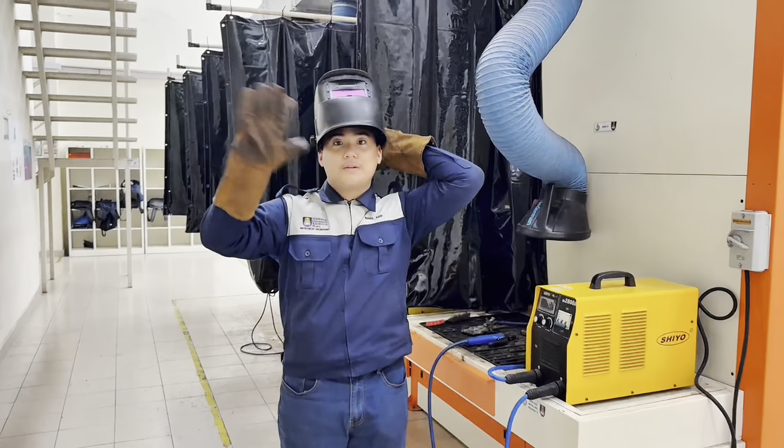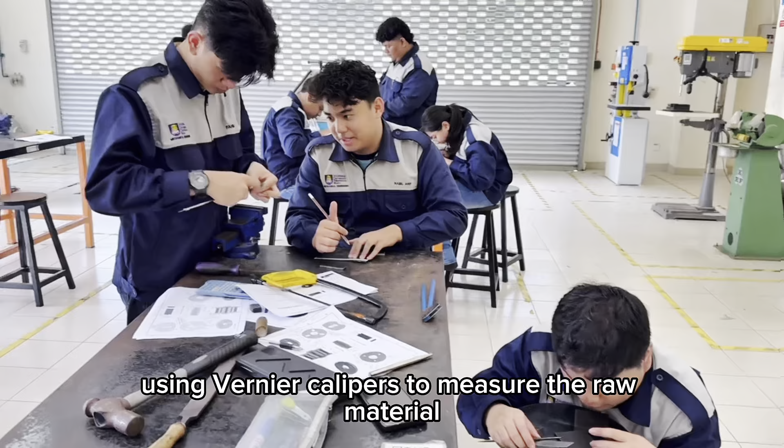I will be explaining the complete manufacturing process of our turbine blade, step by step from raw stock to the finished product. We started with measurement using vernier calipers to measure the raw material. Next, we cut the material with a bandsaw, shaping the stock closer to final size.

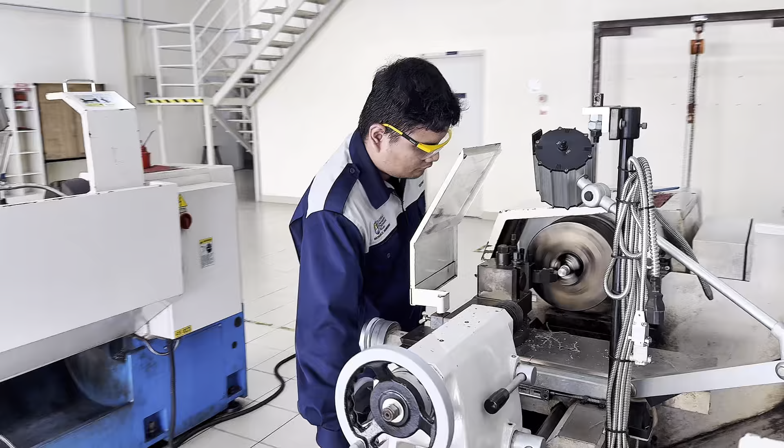After cutting, we did lathe machining. This step shapes cylindrical parts like shafts, ensuring they are perfectly round and concentric. Precise turning is especially important for parts that rotate at high speed, like turbine blades.

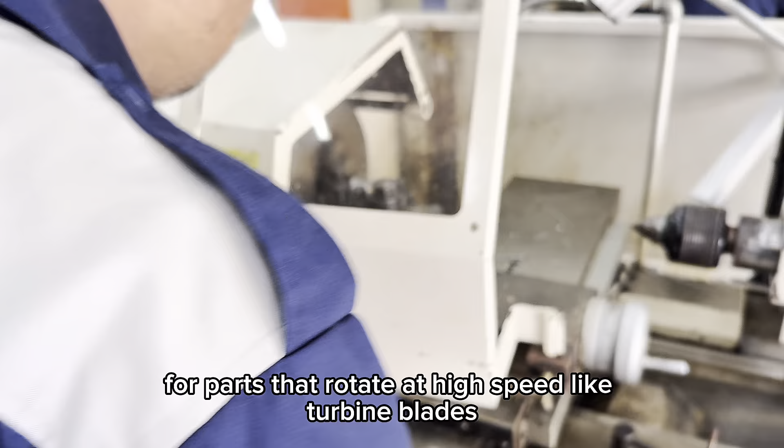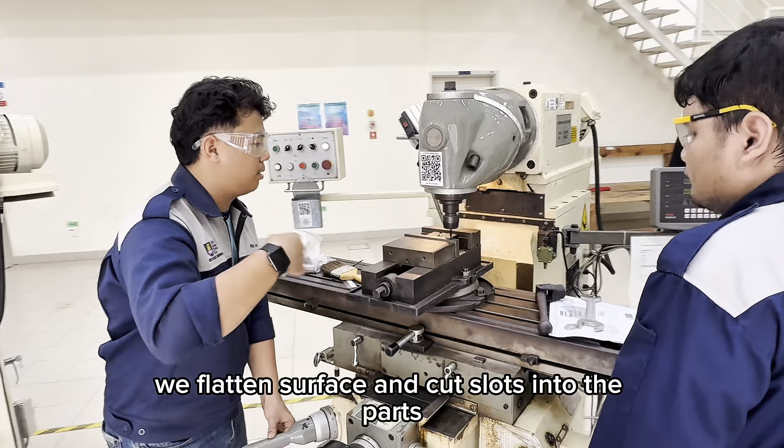Next came milling. Using an end mill tool, we flatten surface and cut slots into the parts. This ensures that every component has the exact shapes and size needed to fit together correctly when assembled.

With surface prepared, we move on to drilling. This step was done with both bench drills and vertical milling machines to create accurate holes for the screws and blades. Positioning these holes precisely is crucial for proper alignment during assembly.

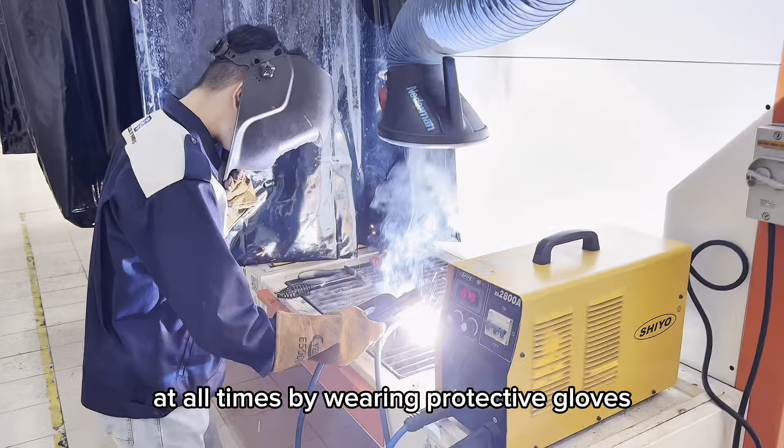Once all the parts were ready, we used welding to spot weld the blade onto the plate component. We made sure to follow strict safety measures at all times by wearing protective gloves, welding helmets, and fire-resistant jacket to keep everyone safe during the welding process.

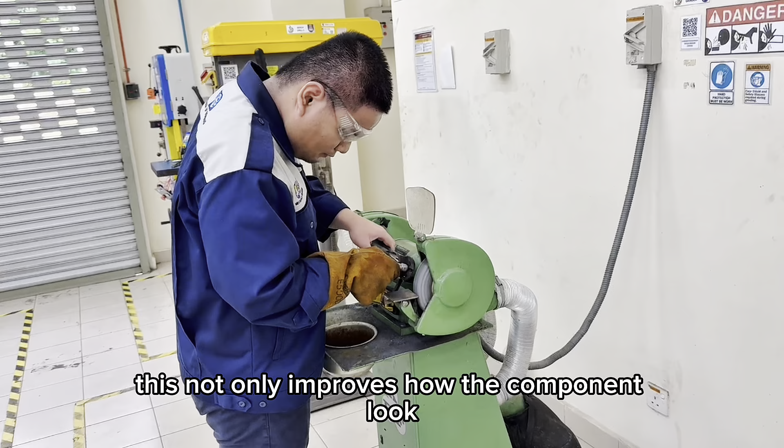Finally, we did grinding to remove weld bits and smooth out the surface. This not only improves how the component looks, but also helps align the parts properly and ensures a clean, professional finish.

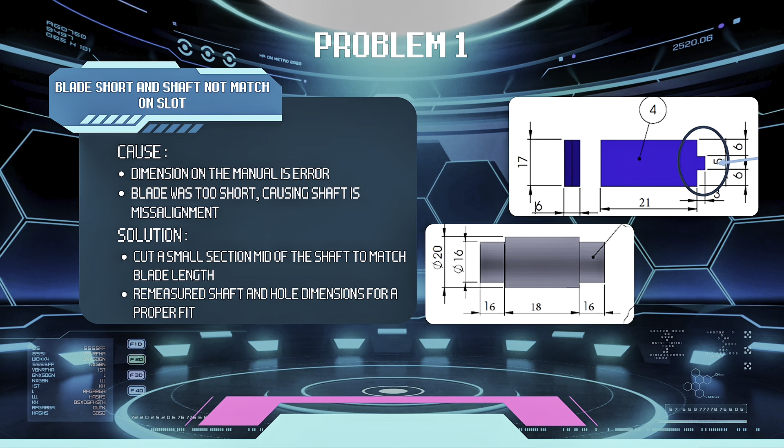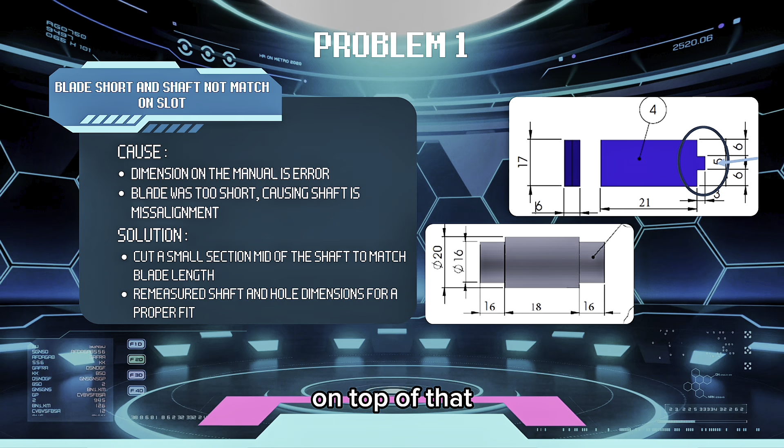Next, problems that we face and their solutions. The first problem that we face in this project is blade short and shaft does not match on slot. The issue happened because the blade was too short, which caused the shaft to misalign and not fit correctly into the slot. On top of that, there was a dimensional error in the manual, which affected the accuracy of the shaft and hole alignment.

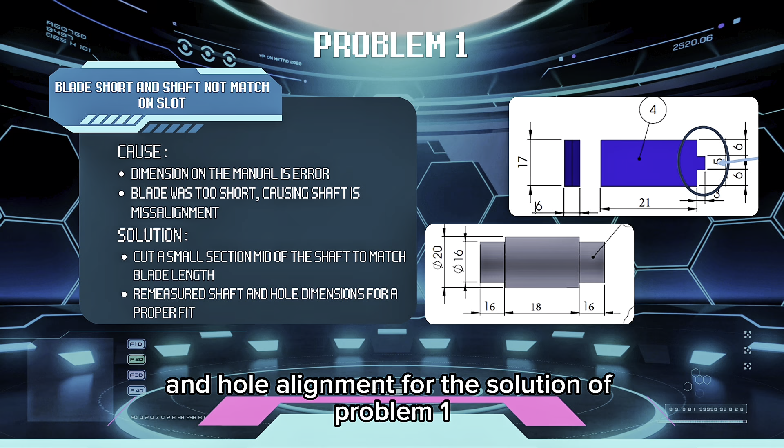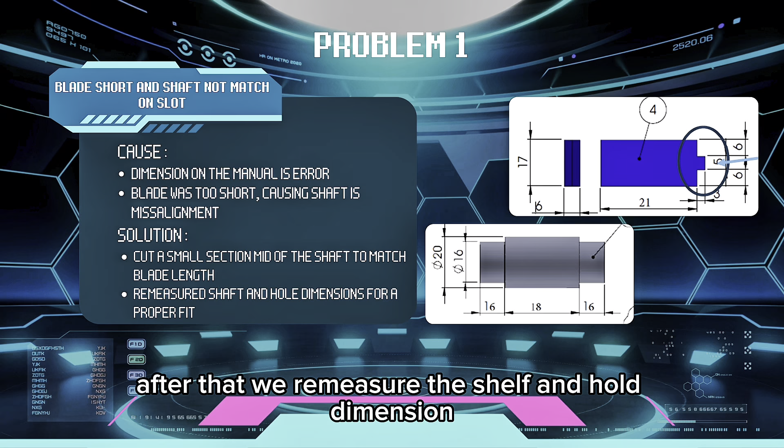For the solution of problem 1, to fix that, we cut a small section from the middle of the shaft to adjust for the short blade length. After that, we remeasure the shaft and hole dimension using precise tools to ensure a proper and smooth fit between the shaft, plates, and blade slot.

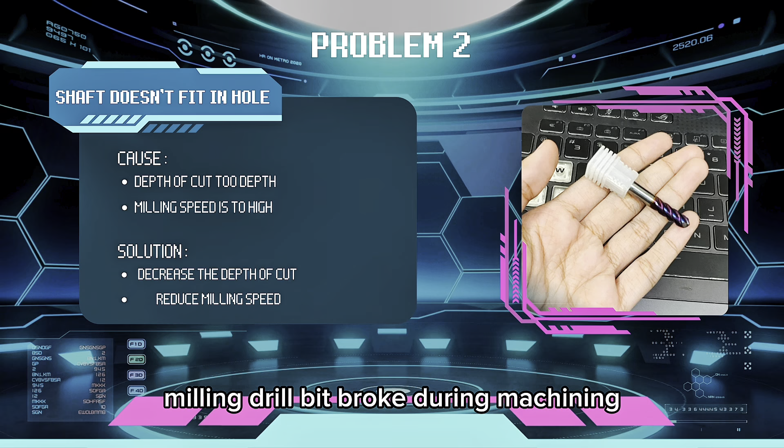The second problem is the milling drill bit broke during machining. The milling drill bit broke because the depth of cut was too deep and the milling speed was too high. This incorrect setting causes too much force on the tool, leading to breakage.

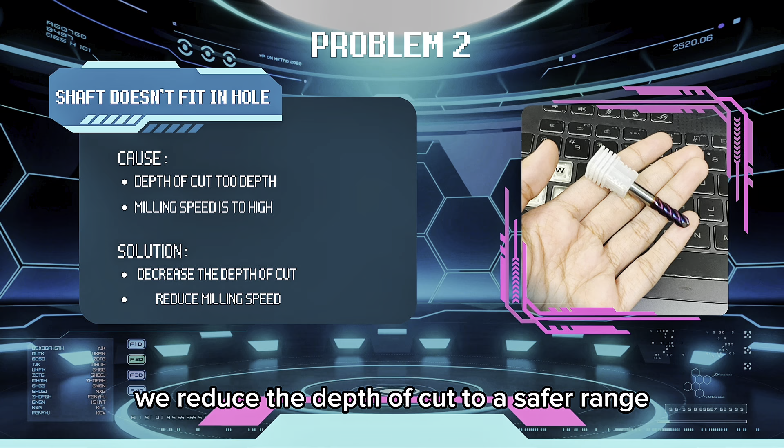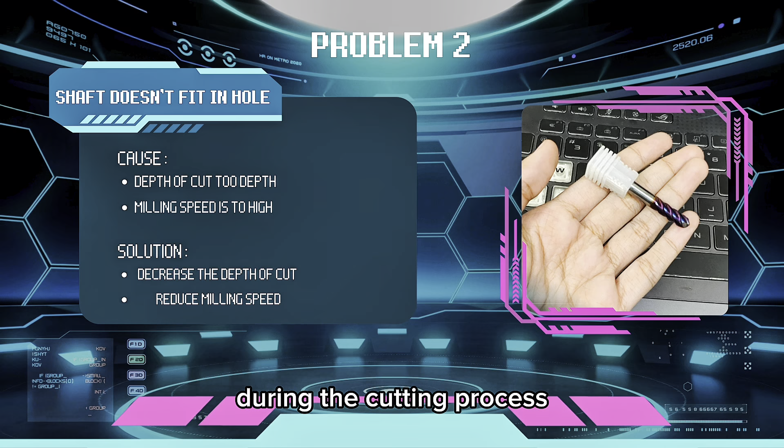The solution for problem 2: to fix that, we reduce the depth of cut to a safer range, around 0.4 mm to 0.6 mm per pass, to avoid overloading the tool. We also lowered the milling speed to reduce stress and heat during the cutting process. This helped ensure smoother machining and prevented further damage to the tool.

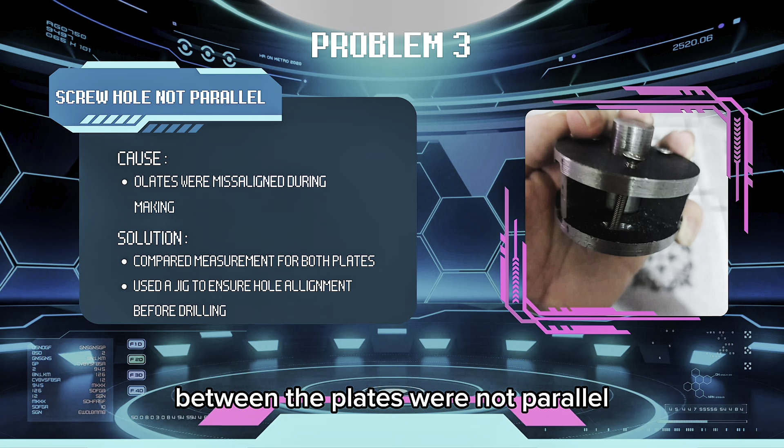Another issue was that the screw holes between the plates were not parallel. The plates were slightly misaligned during making. Our solution was to compare measurement for both plates and use a jig to ensure hole alignment before drilling.

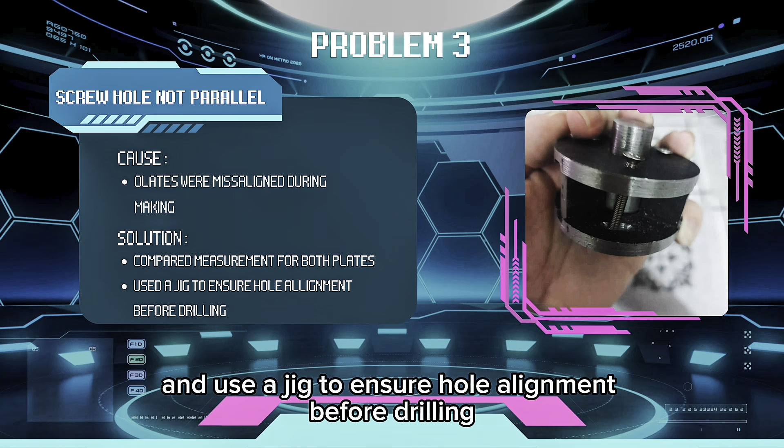For problem 4, we encountered an issue where the blade gutter was not parallel. This problem happened because of misalignment during the milling process. When the workpiece or the milling cutter is not properly aligned, even a slight deviation can result in the gutter being uneven, which can affect the assembly of the final product.

To solve this, we use alignment fixtures to hold the workpiece securely in the correct position throughout the milling operation. These fixtures ensure that the parts stay in place and do not shift due to vibrations or cutting force. Second, we constantly measured the parallelism during the process.

By checking frequently, we could make immediate adjustments if we detect any misalignment, maintaining the required tolerance. This approach significantly improved the accuracy of the blade gutter, reduced rework, and ensured a better fit and function for the final assembly.

The last problem is time delay when making the turbine blade, mainly because there were too few machines available and we had to wait for others to finish using them, which caused unnecessary downtime. To solve this problem, it is important to provide additional machines to increase production capacity and reduce waiting times.

Additionally, implementing an efficient schedule system will help allocate machine usage properly, ensuring that all machines are used optimally and production delays are minimized. Next part is improvements that we can have from our project. The first improvement is using stronger and more durable materials.

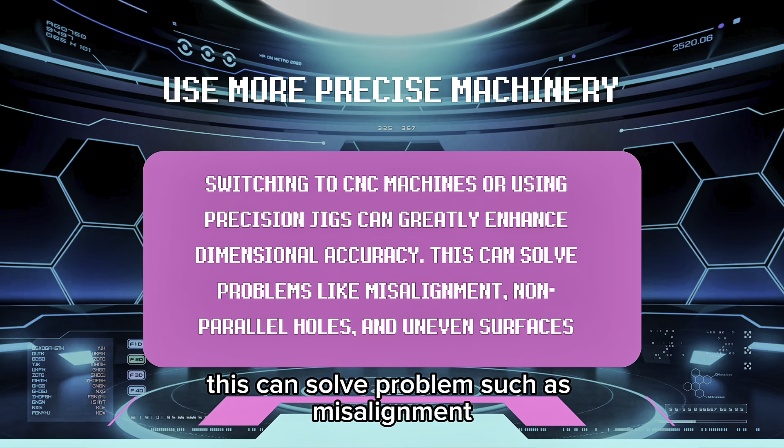By using higher grade steel or more resistant cutting tools, we can reduce wear, improve precision, and avoid rework. This results in a more efficient process and better quality in final product. Secondly, switching to CNC machining or using precision jigs can greatly enhance dimensional accuracy. This can solve problems such as misalignment, non-parallel holes, and uneven surfaces.

Lastly, implementing digital measurement tools can greatly improve the quality control of our work. Using digital calipers, micrometers, and alignment gauges can help to get a precise measurement. The advantage is that real-time data helps us detect any deviations early in the process. This ensures smoother assembly, better fits, and fewer reworks.